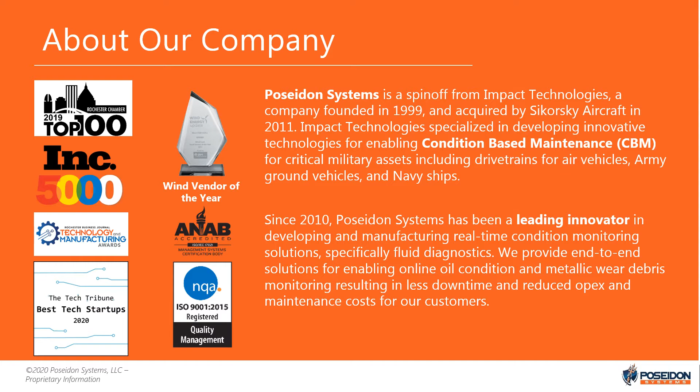Now, the vast majority of wind turbine operators perform oil sampling and analysis about twice a year, and that corresponds with their semi-annual preventive maintenance tasks. These operators rely upon these analyses to provide some assessment on the equipment life, the lubricant health, and even contamination levels. But it's difficult to ascertain the gearbox condition, because while this offline analysis is a useful tool for assessing the health of the lubricant, it can provide limited utility as a diagnostic indicator for gearbox health.

These limitations of offline oil sampling and analysis for gearbox health monitoring stem from sampling practices and the very nature of gearbox fault progression. Wear rates are highly variable in wind turbine gearboxes. With a limited sampling frequency and only a small volume of oil analyzed, fault detection by offline oil analysis can be very unlikely.

Online oil condition monitoring systems can tell us many things the way an oil analysis lab can. For instance, they can examine ferrous wear debris particles and even non-ferrous particles, which can be coming from journal bearings. They can understand how much water is in the system as a contaminant, can even understand the remaining oil life, and they can be outfitted to understand the breather health. Diagnosis and recommendations can be set; alarm limits are preset and also adjustable according to past data and trends.

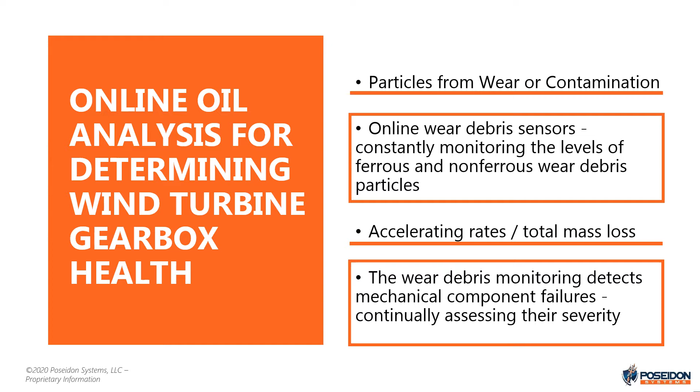There are many benefits to using online oil analysis in your wind turbine. Sampling can be done at any location of the system. It's relatively low cost compared to an oil analysis laboratory sample, and the only contamination would be from the system itself. Sampling is almost unlimited, and there's immediate detection of a breakdown in the oil or a contamination event.

This does have some drawbacks, though. The degree of sensitivity is limited to sensor technology, and there's a limited number of different tests that can be performed right now, but that's changing. It's not a direct replacement for lab sampling.

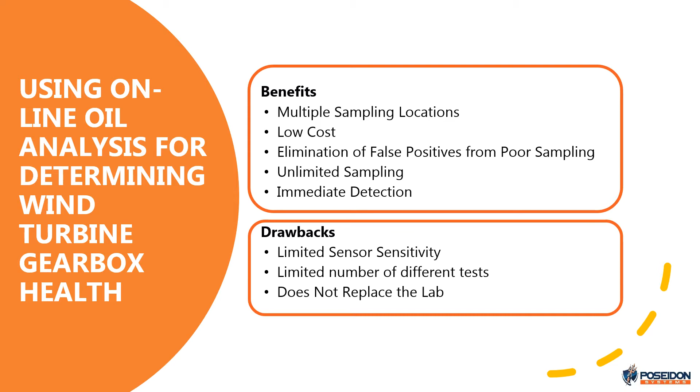Now, using online oil analysis for determining wind turbine health, the first thing we look at is the oil condition. Here we examine the chemical properties that could develop as the oil is stressed. We could look at viscosity and even electrochemical impedance spectroscopy, and that can tell us a lot about the lubricant health itself. We also look at contamination analysis. This identifies the presence of substances that may contaminate the system, leading to failure, things like water and even particle size population.

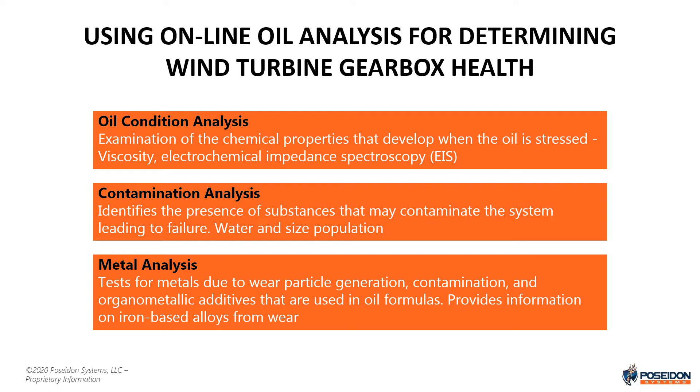And finally, metal analysis. We can test for metals due to wear particle generation, contamination, and even the organometallic additives used in oil formulas. This provides information on iron-based alloys from wear as well. Now here's an example of oils being sent off for 140 different assets. Here we're taking a look at a case study. We look at the concentration of iron as well as particle count.

Now if you look at the x-axis, that's the number of turbines, 140 of them. And in here, iron concentration in parts per million. You can see the alarm limit was set at 70 parts per million. We have 0.8% false alarms detected and 100% missed detections. Now the 50 parts per million was a warning, where we had 13% false alarms and 72% missed detections.

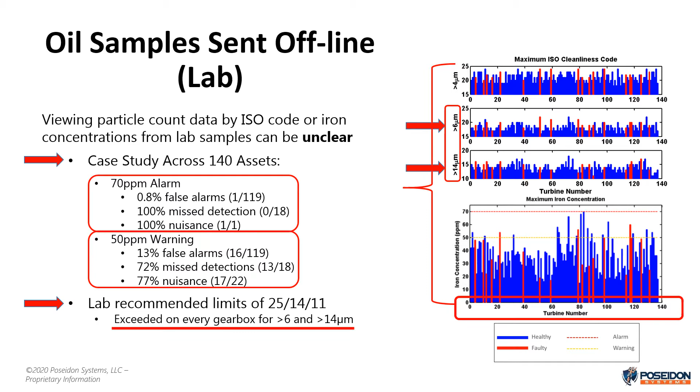The lab recommended limits, 25/14/11 for the ISO counts, well, that exceeded every gearbox, greater than 6 and greater than 14 particle size. When we take a look at the wind turbine gearbox health example here, our first time range, the low fault severity assessment is assigned due to elevated yet relatively stable wear debris generation.

The second time range, between July 1st and August 1st, the severity increases. And incidence of particle generation also increases. But if you look at the third time range, a rapid increase in both peaks of ferrous debris concentration and a corresponding decrease in the amount of time between these peaks indicate a greater probability of a catastrophic failure approaching.

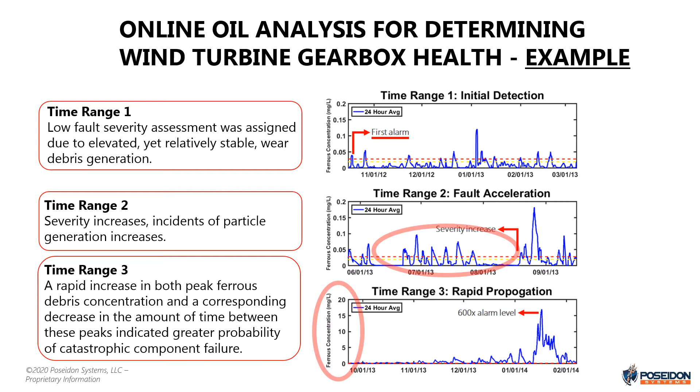Now here's an example where we had oil samples sent off to the off-site lab during a 14-month timeline, yielding no significant findings. Here, in star number 1, we have normal ISO codes in March, but in September, our actual ISO code decreases. Now we see past January, the ISO code under alarm limits, even after significant ferrous concentrations are indicated. And then finally, a gearbox had to be replaced.

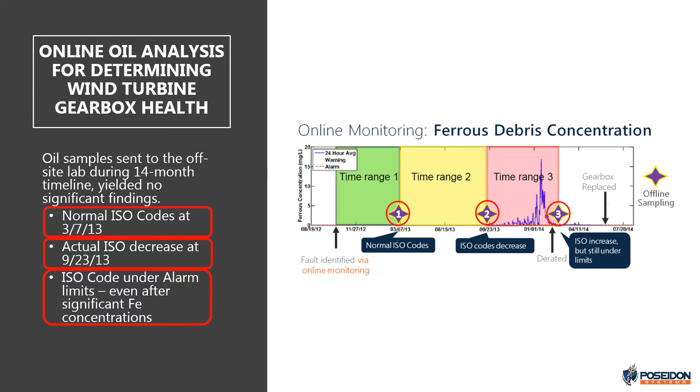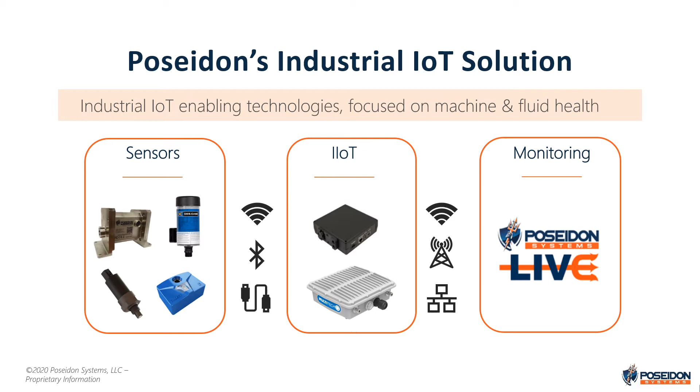The wear debris sensors we're talking about are the DM4500 and the DM4600. They're considered best-in-class inductive wear debris sensors, and they provide the earliest detection for mechanical failure within the asset. These sensors have actually been retrofitted in over 5,500 systems in the past 5 years. Now, these have been selected for new wind turbines as well, and aftermarket by several OEMs due to the superior performance compared to other sensors.

They work on inductive coil metallic debris monitoring, and that monitors wear levels and determines asset health in an intuitive manner. These are considered best in class with their sensitivity, detecting ferrous particles as small as 40 microns and non-ferrous particles as small as 150 microns. And this is why several OEMs have elected to use these in their systems.

It's real-time continuous monitoring, detecting and characterizing these wear events, which would typically be otherwise missed. It is the earliest detection of mechanical failure. It detects failure in earliest stages and estimates the remaining useful life. The 4500, that's a mainline bypass. The 4600, that's for the pump and filter integration. That's off the mainline filtration system going into a CC Jensen offline filtration system.

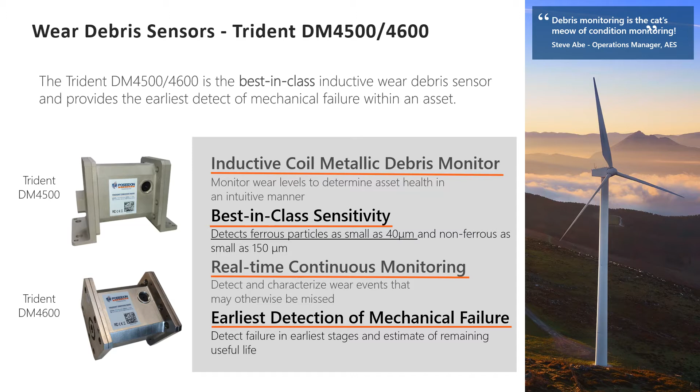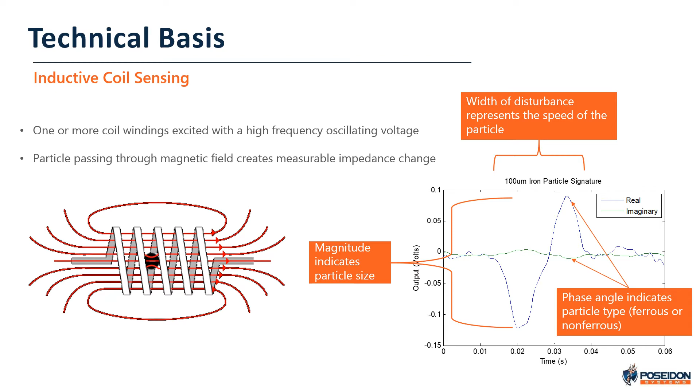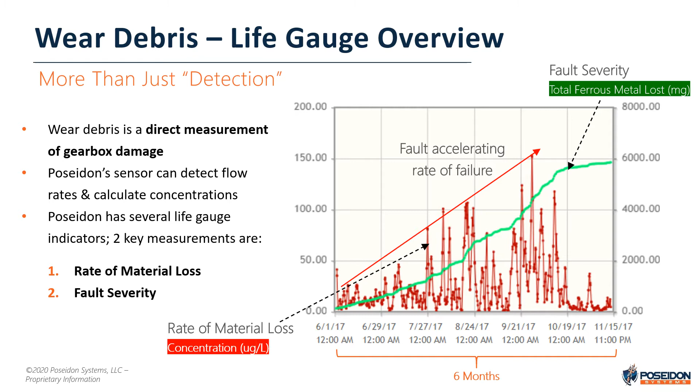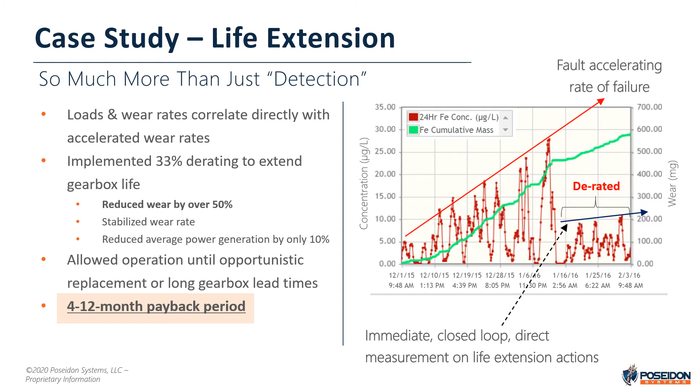Here's an example of a case study for planetary bearings. Now, planet bearings are difficult to detect with vibration analysis early on, but they do make up the majority of the gearbox failures. The vibration systems do a poor job of detection in planetary bearings. The wear debris sensors detect wear faults earlier than a vibration sensor. The solution here? Well, wear debris can detect early stage planet bearing failures better than other methods.

Now, it detected a fault back in June 2015. Derated to extend the life and shut down for repair 2.5 years after the fault detection. That wear debris monitoring enabled 2.5 years of safe operation at full power and a planned outage for repair. Normally it's 15 days here versus 45 to 60 days. So here we had 30 days of additional power.

There's up-tower repair instead of a gearbox replacement, which would have required a crane, very expensive, very timely. So it was a reduced number of required bore scopes as well. We looked at the validated total savings, about $250,000.

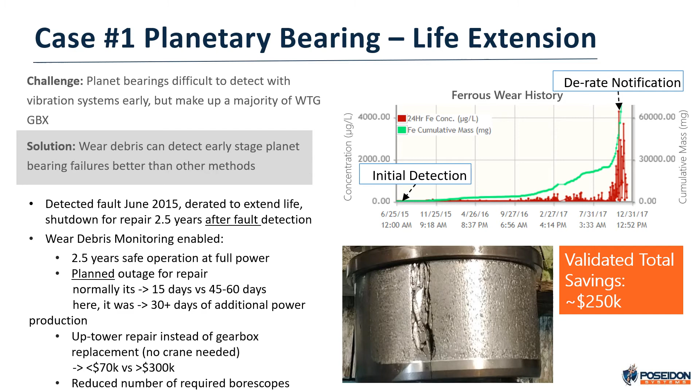Here's another example of a case study, planetary bearing. In this case, we're looking at a rapid development of a fault. The challenge here is that these failure modes can sometimes lead to rapid failure degradation, and that's usually undetected. You only have an initiation to derate within a couple of weeks. The solution here is wear debris to detect those rapid faults quickly for immediate cost-saving actions.

Now, our first event happened on February 6th. It was bore scoped on 2/15, derated 50%, then on to 66% to eliminate any catastrophic failures. The shutdown for repair was 6 weeks after that derating. The wear debris monitoring enabled an immediate detection of rapidly progressing faults.

Now, our planned outage for repair, in this case, was 15 days versus 45 to 60 days. That's an additional 45 days of additional power production, and a catastrophic failure was avoided. This is a significant reduction in cost. It's an increased number of findings than any other method available. Validated total savings here, $80,000.

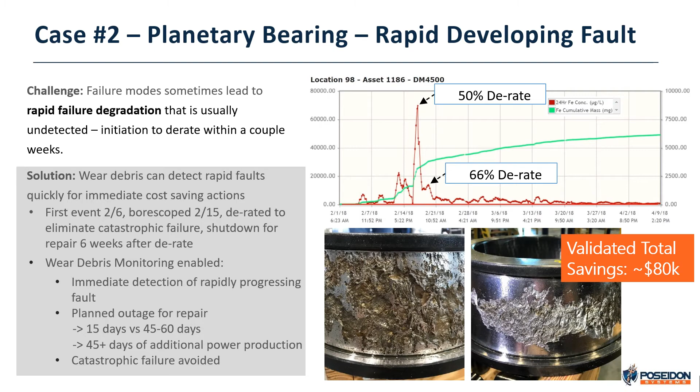In this particular case study, we wanted to know if we could reduce the bore scope usage. The challenge is that bore scopes can be costly and vary from team to team. So here we took a look at all 15 assets. In this case, we only had to use the bore scopes on 7 of them, because the wear debris sensors identify the turbine's wear, and without sufficient wear, there's no need to warrant a bore scope.

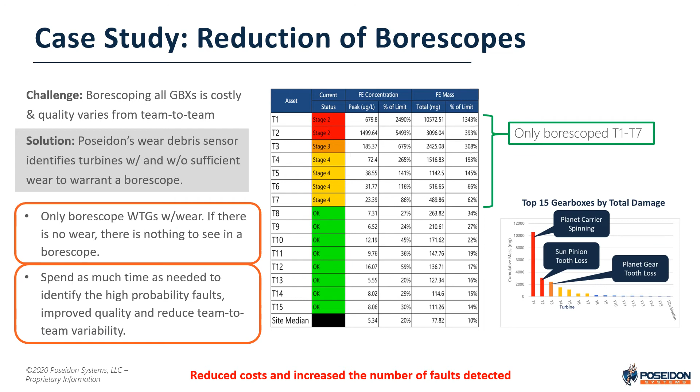You see, only borescope with wear. If there is no wear, there's nothing to see. There's no need for a borescope. And we can actually spend as much time as needed to identify the high probability faults. This improves our quality and reduces our team-to-team variability.

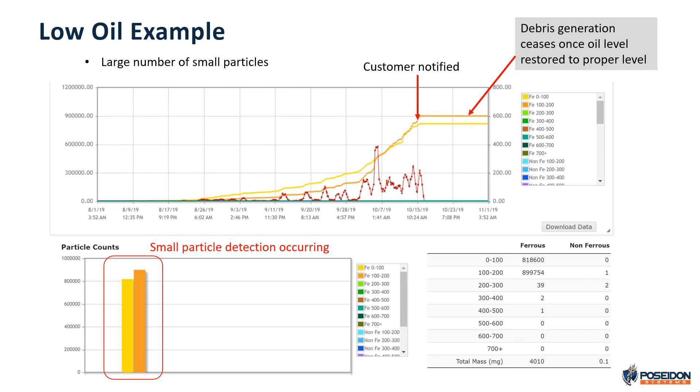Here's an example of gear tooth liberation. A large amount of metal is generated over a short period of time, in this case, only a few hours. And the contribution of these particles in all the bins has exponential decay. This debris is generated suddenly and without any kind of warning, and then generation stops. These systems catch these things quickly and allow for turbine shutdown and prevention of any kind of catastrophic damage.

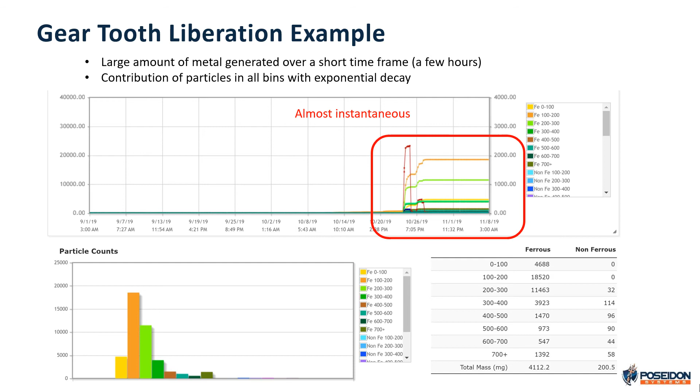In this example, we're looking at the bearing spall. Here, large amounts of metal are generated in a more regular manner with increasing amounts of debris, but the particle size doesn't increase. The contribution of particles in all bins actually exhibits an exponential decay. Compare this to the gear liberation example prior. This one's a slow buildup as the fault progresses. The OEM vibration system did not pick up this fault.

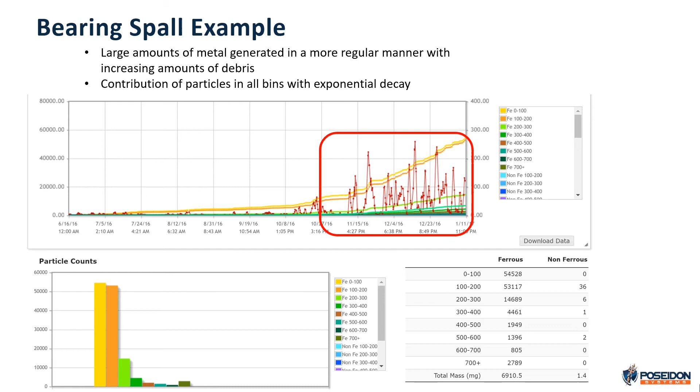Here's an example of the spinning bearing. Once again, the OEM vibration couldn't pick this up. This system is the only system that can find that spinning bearing. Multiple discrete events of these small bursts of metals over a short time frame, only a few hours in this case. It's a contribution of particles in all these bins with greater weighting in smaller particles. Now, this could possibly be correlated to large ambient temperature swings.

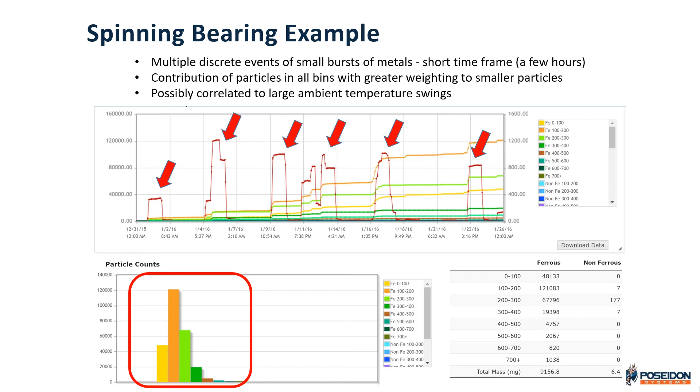Here's an example of the planet carrier spinning and pinning repair. Large amounts of metal are generated in a periodic manner. Now, post-pinning operation, the wear generation drops off dramatically, and that's after the detection occurs. Not only can Poseidon detect the fault, but monitor the success of the lower cost fix over time.

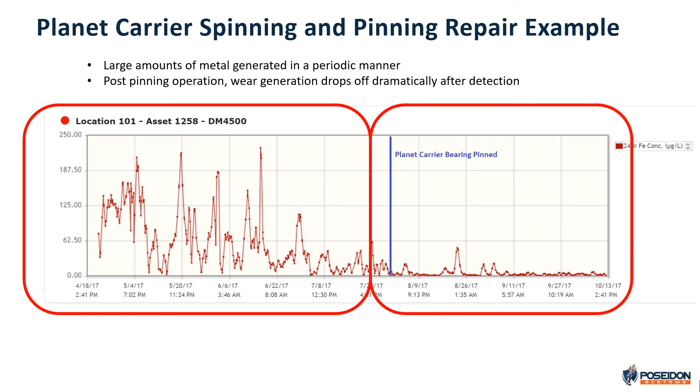Here's an example of remote oil health monitoring. In this case, you see a rapid degradation of oil, and that can occur due to contamination, leaks, etc. It can damage equipment before the oil samples are actually taken or even returned from the oil analysis lab. Real-time detection of the oil degradation is possible.

An algorithm detected the slope change and creates an alarm. This leads to an immediate inspection and then an oil change before any kind of further damage can occur with that asset. Lab samples taken every 6 months or so won't catch any kind of contamination or this kind of damage.

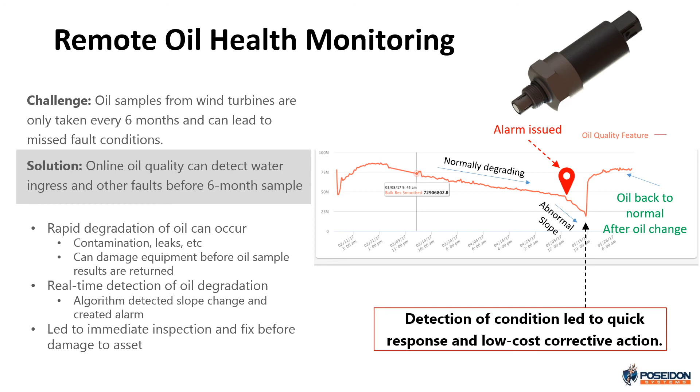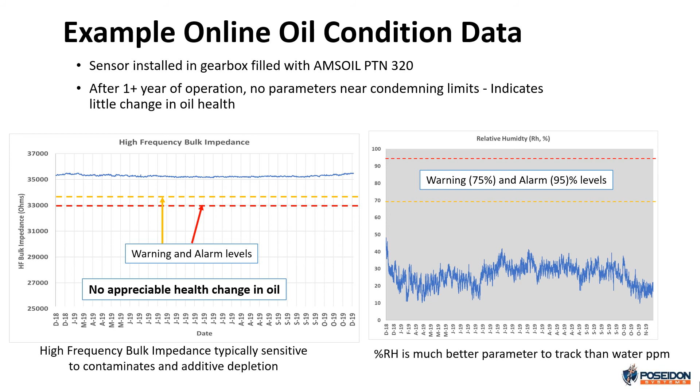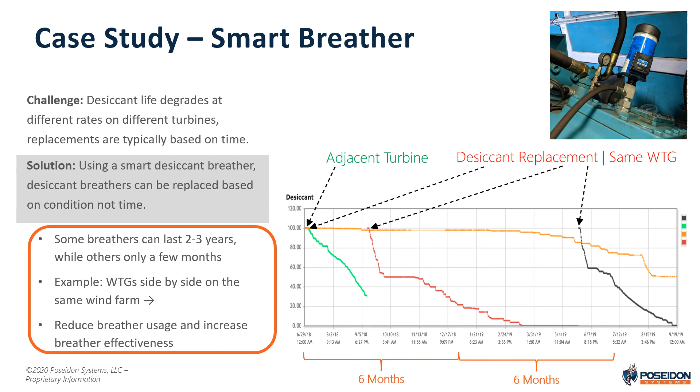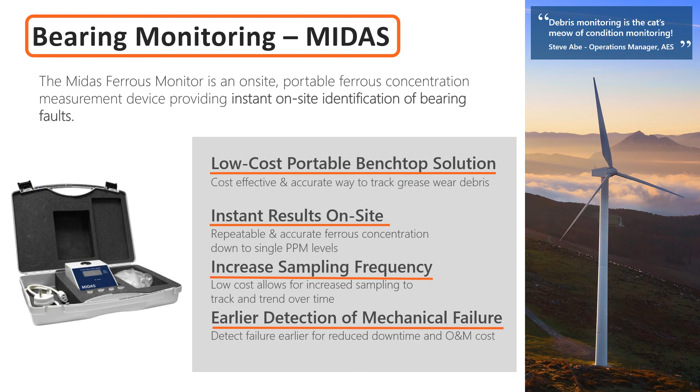You can increase sampling frequency due to this portability and low cost. It allows for increased sampling to track and trend over time. It's a way to detect failure early on. You can detect failure early for reduced downtime and operation and maintenance cost. It comes out to be less than a cent per sample.

Now, there might be some older wind turbines out there that don't have fiber to tower or Ethernet up tower connectivity. In this particular case study, Poseidon developed a site-wide wireless network utilizing LoRa through a single wired or cellular connection. It's one communication system for one cellular device. Validated to a 6-mile radius, a 12-mile diameter of line of sight.